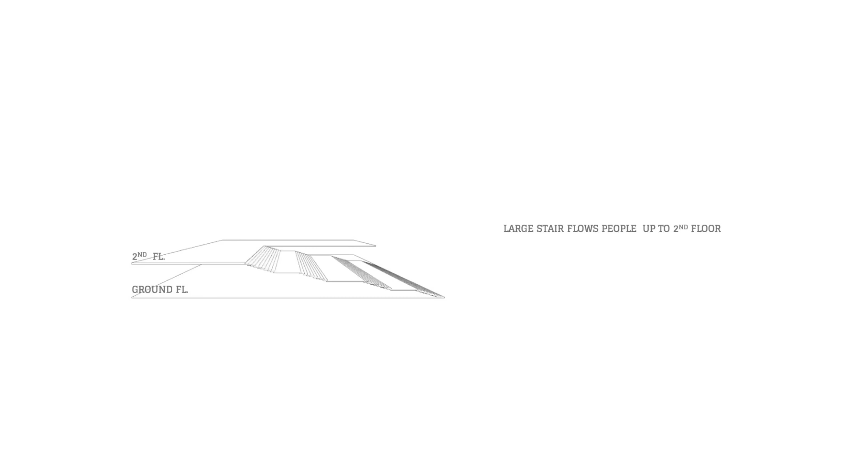The first challenge of a multi-story commercial building is how to flow the customer up. Normally, shops on the ground floor work much better than those on upper floors. We provide a large staircase to draw people up from the ground. The stair is as wide as two-thirds of the frontage. Then we fold down half of the stair to get customers into the back of the ground floor area.

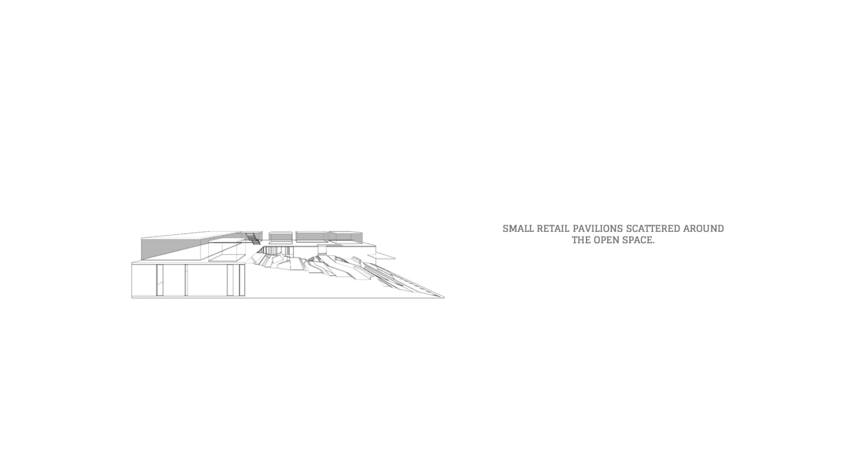This main open-air space was called the common ground. On this floor, we place small retail pavilions scattered throughout the space. Then we add seating and planting to make the customer feel leisurely walking up.

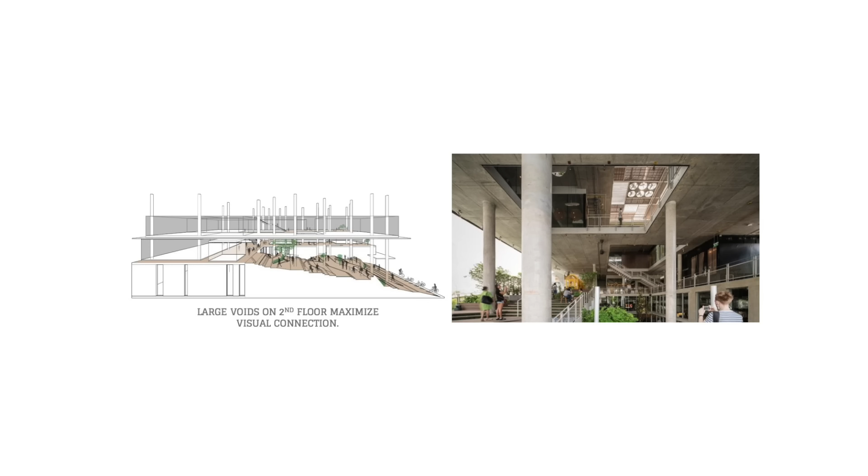Large voids on the second floor maximize visual connection. Customers arriving at the property from the road will immediately see shops on the upper floor. On the third floor, there are also large voids. Customers can see and be seen from all levels. Then the roof.

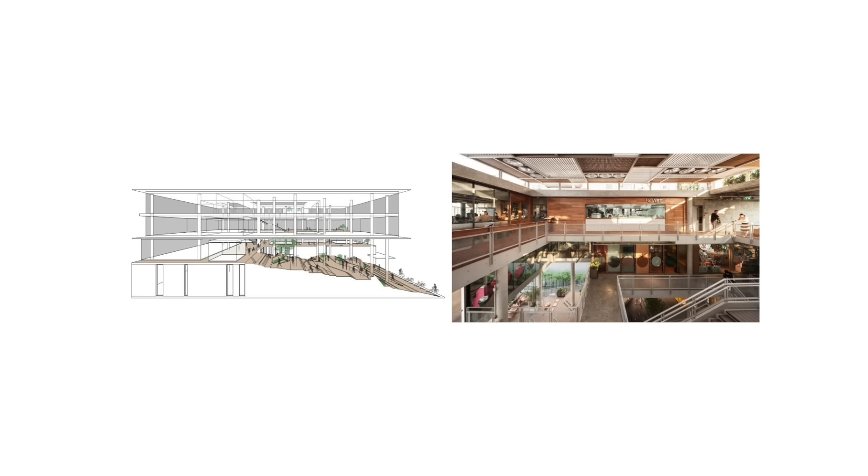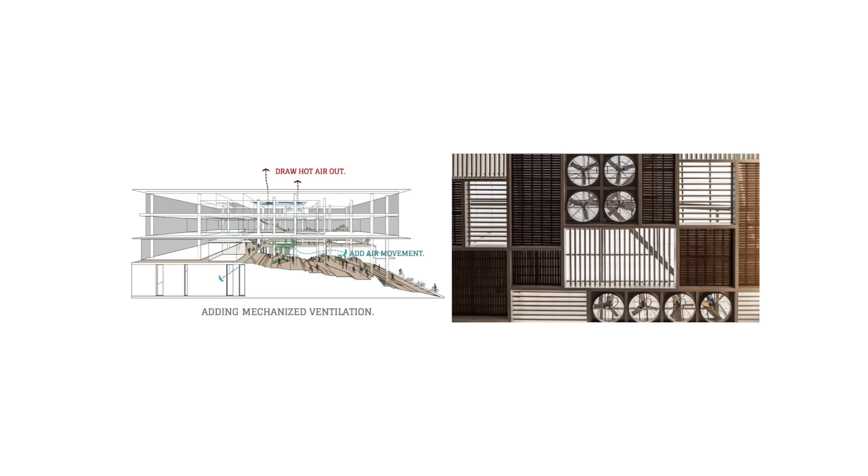A large skylight in the middle brings light into the open-air space. Now, the biggest challenge is how we make this open-air space work well in our hot and humid climate. Beneath the skylight is a screen that diffuses strong sunlight into a more comfortable light ambient. We provide two sets of industrial fans incorporated in the screen. One set draws hot air out, another blows air down to create air movement for customers' comfort. This common ground is so open that it allows ventilation to come in from all sides, or even from higher levels, wind comes down through the large voids on the floors.

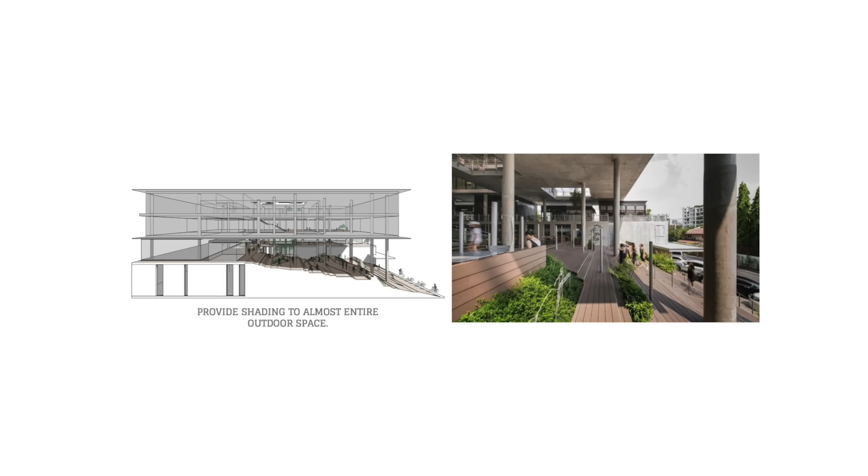The upper floor structure floats above the common ground and acts as a big umbrella that provides shading for almost the entire area and protects the common ground space from the rain. The gesture of the architecture is welcoming. It widely opens up to the neighborhood.

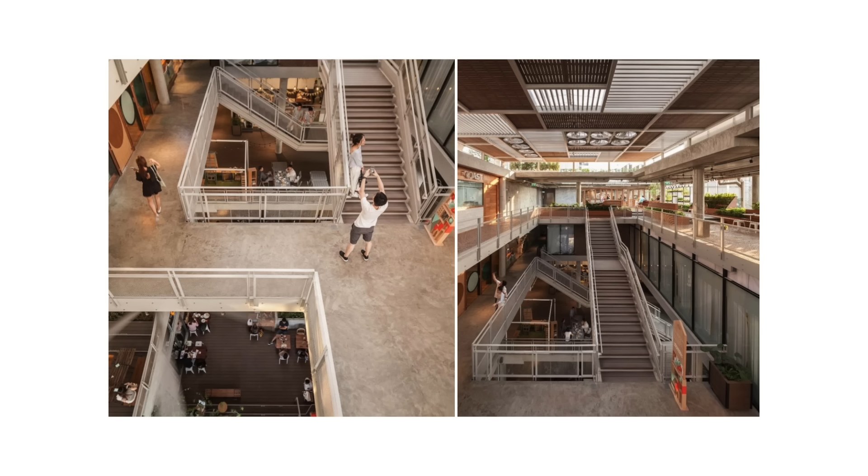The project attempts to carve out an open-air public living space, folding upward as a backbone of the building within such a limited footprint. In this common ground, customers can leisurely sit on chairs, benches, steps, or lie on the floor mat. This common ground becomes a place where grandparents stop by in the morning for a cup of coffee, office workers come for a quick lunch, housewives bring their kids to play after school in the afternoon, and expats and young Thais enjoy dinner and hang out together at night.

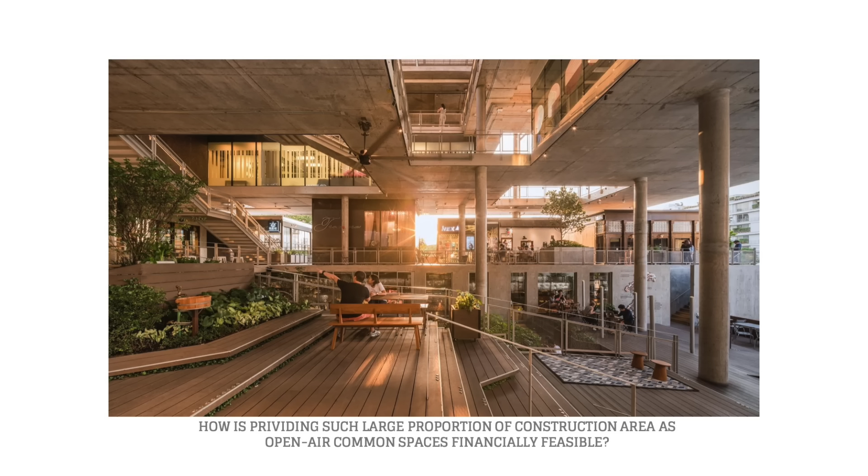The challenge now is how to provide such a large proportion of construction area as open-air common area and make the concept work financially. In a normal community mall case, for the ground floor area we have, we might be able to put in 7 normal-sized restaurants, where a third is their kitchen. We propose that each shop only take half the usual size, just enough for their kitchen and a few stools. So now we can get twice the number of restaurants.

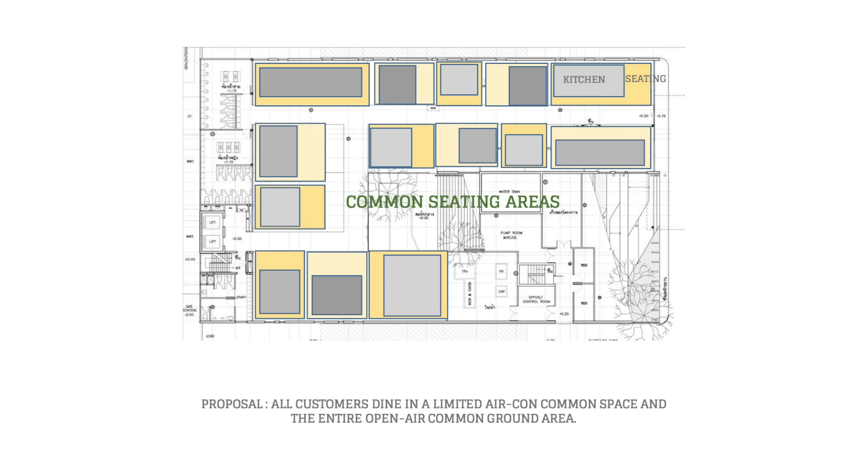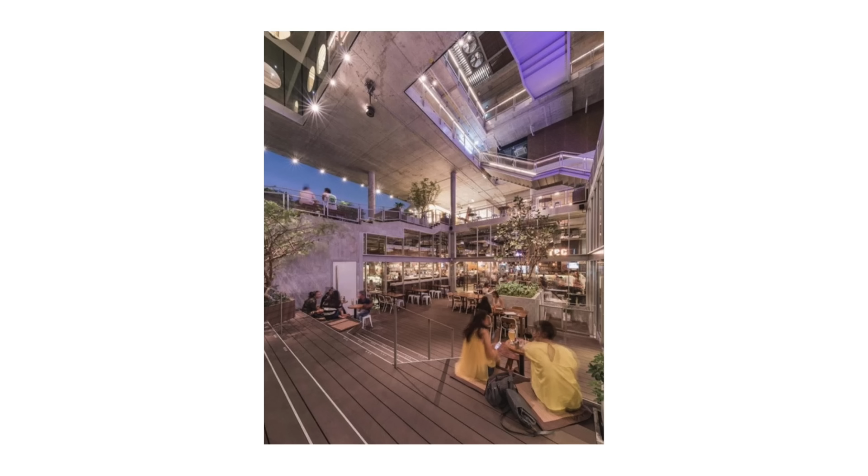All of their customers can dine together in a common area, in a small air-conditioned space, or on an expanded open area of the common ground. We convinced the owner that this is actually a win-win-win situation. The first win is for us, the architect, that we could get an impactful size of open-air space. The second win is for the project owner, that they invest much less in construction costs and a lot less in building operating expenses, since a large portion of the building has no air conditioning.

And the last win is for the tenants themselves, since their expense for starting up a shop is only for the kitchen. Seating areas are provided by the property. This scenario attracts newcomers who don't have big investments like those restaurant chains, which is why there are lots of new and interesting small restaurants there, not repetitive like chain restaurants in shopping malls.

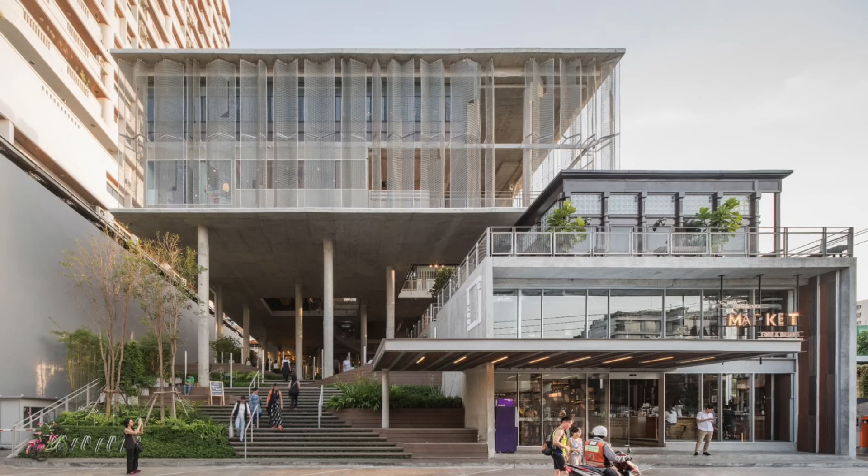Architecture of this private property has now become a common space for community. By saying architecture, I mean architecture, not architect. These kinds of efforts don't take an architect alone to do it. It needs collaboration between the architect and the investor.

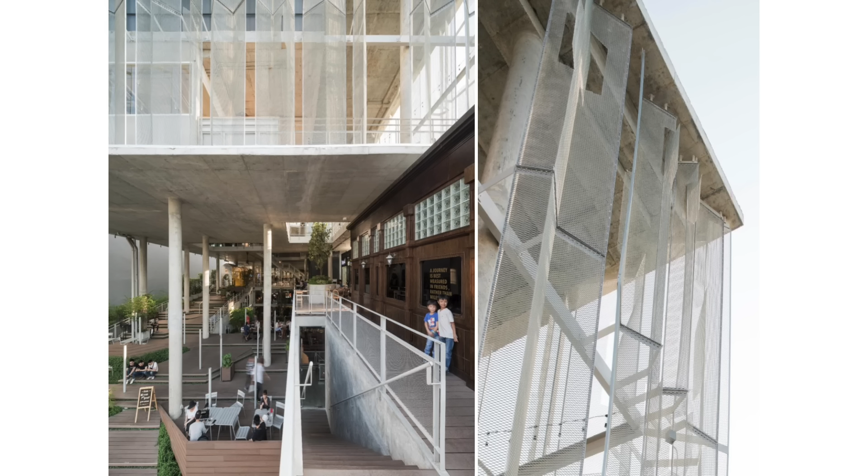In this project, the architect proposed the space that would conceptually work well in terms of architecture. But it is the investor who would have to be willing to sacrifice the expensive rental space in exchange for a communal public space. However, they have to work financially.

The next project that I'm going to show is a small pavilion called the Flow. It is a multi-purpose pavilion for a community near the beach. The site is on this empty concrete platform, and the client does not give us any project brief. They wanted us to help propose a pavilion that will be useful, and the rest is up to us.

We started not by designing the physical building, but by designing the activities that could happen in the space first, the program that would best suit the site. Then we cut and fold the floor plate and allow the possibilities of those different usages to happen.

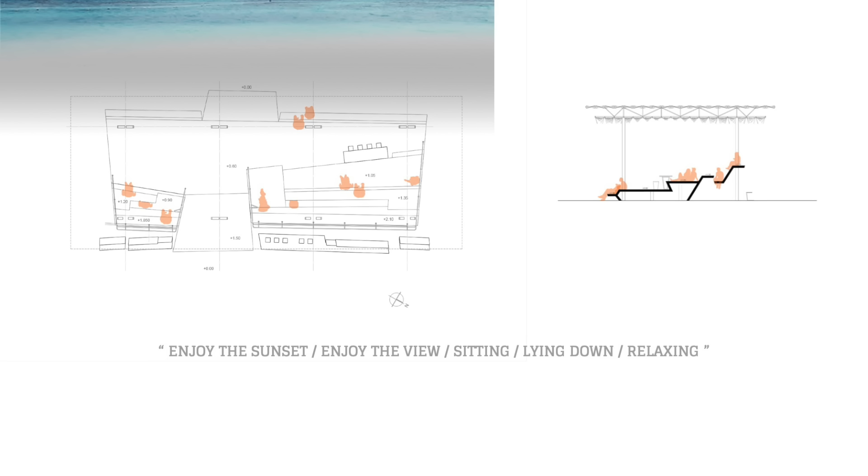The plan and the section are designed to open up for different possible activities, different ways that people can come and interact with one another, with the site, and with the architecture. And as the site is on this concrete platform with blazing sun, the architecture needs to become a shading device.

We are not thinking about the roof as a traditional roof, but rather we look into nature for reference of an effective way of shading and cooling with a volume, and we see a volume of small elements like leaves that the air can move through. It gives the shading and the air can move through, rather than a normal roof which would block the air from moving and flowing away upward.

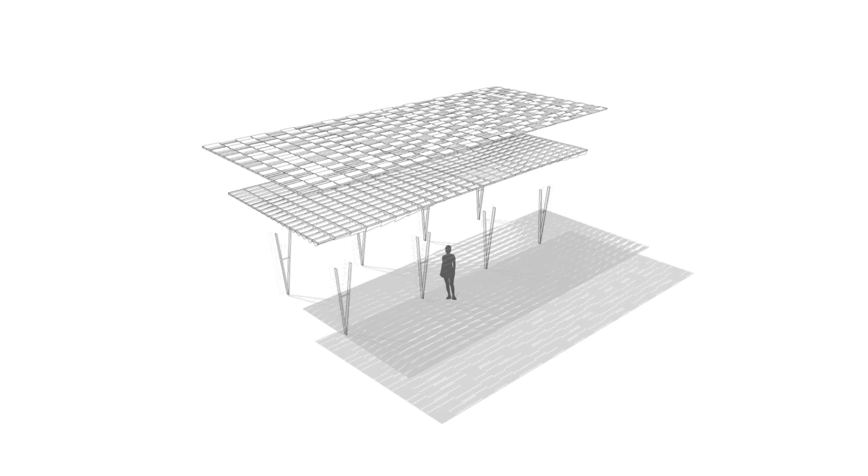Hence the design of the shading started to be formed from the idea of tree leaves. We have designed layers of small elements that superimpose on one another, which will help form the shading, while also still allowing some light to seep through into the space. And that's a study of the building.

And we have studied the possible ways the small elements can be fixed at different angles that would allow different levels of sunlight or the light that comes through.

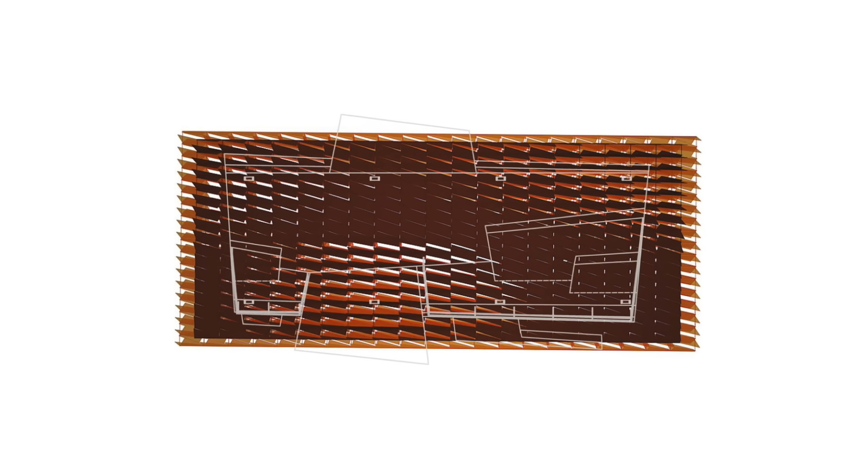And we superimpose this onto the plan, on the floor plate of the plan, where people would sit, like the main space that people would sit would be around here, and that's the entrance. So we are able to open up the elements much more in the space where people are not actually sitting, or on the edge, around the edge where people are not there. So the usable space within the building kind of informs how we design the pattern or the rhythm of the roof itself.

And we use two layers of the roof, with the translucent roof on the top and the solid one on the bottom. And that's how it works out to become the area of the roof around the entrance into the floor plate. So these are more close-up details.

The elements are sort of like tree leaves that give shade, allowing a little bit of sunlight to come through, and also the heat that usually rises up will be able to escape the building.

So this is the final design of the building, and the design of the floor plate itself has been like a folding plate.

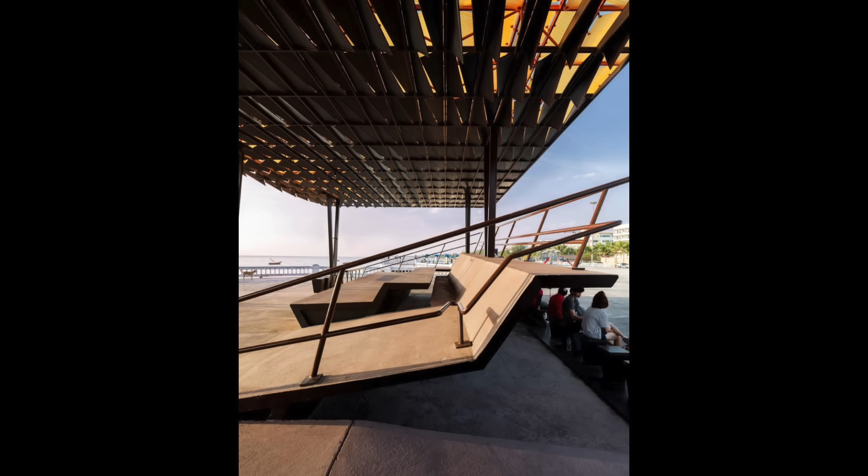in 2 layers, on the ground and on the top. So it allows for different variation of usage of space, thus becoming multipurpose.

In this image you see how the floor plate has been folded, and sometimes it folds up and becomes a table, and folds down to become a chair, where people can sit.

As you sit up high in the air, you need some footrest, so we designed a footrest for the people underneath the folding chair. The footrest itself at the feet becomes the facade of the building.

Looking at approaching the building from the land side and entering the building, there is some detail that people can step on to go up to the higher level.

There is also a fixed table at the end where kids can come and do their homework, and even at the edge of the floor plate, it also falls down and becomes seating that people can sit on.

People can sit down and look at the sunset view over the sea. Another view to look at the floor plate that becomes the chair and the table, with the light.

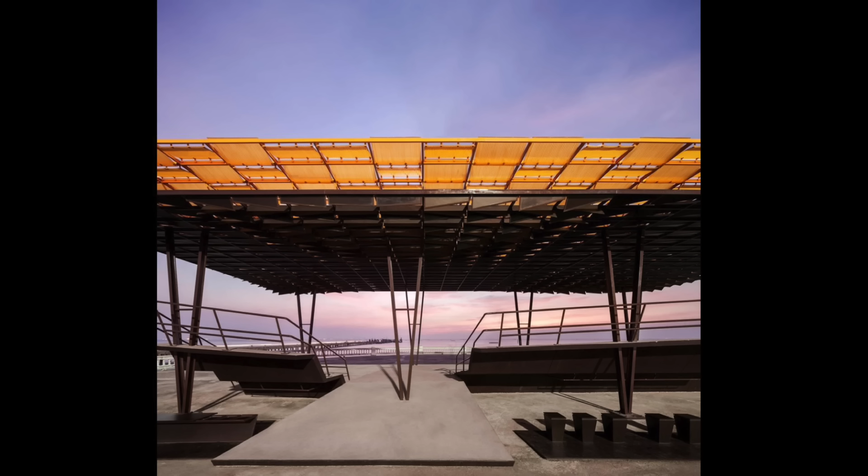Next is Little Shelter Hotel, a small hotel in Chiang Mai, Thailand. Chiang Mai was once the capital of Lanna, the historic kingdom of northern Thailand, established several hundred years ago.

It's renowned for its beautiful old temples, crafted wooden houses, and unique vernacular structures, all reflecting the impeccable craftsmanship of northern Thai artisans. Chiang Mai is also celebrated for its exceptional handicrafts, from wood carving and silverware to silk and paper umbrellas of Bo Sang village.

I would say craft is truly the spirit of northern Thai culture, so it was our intention to embody the sense of craft into the architecture.

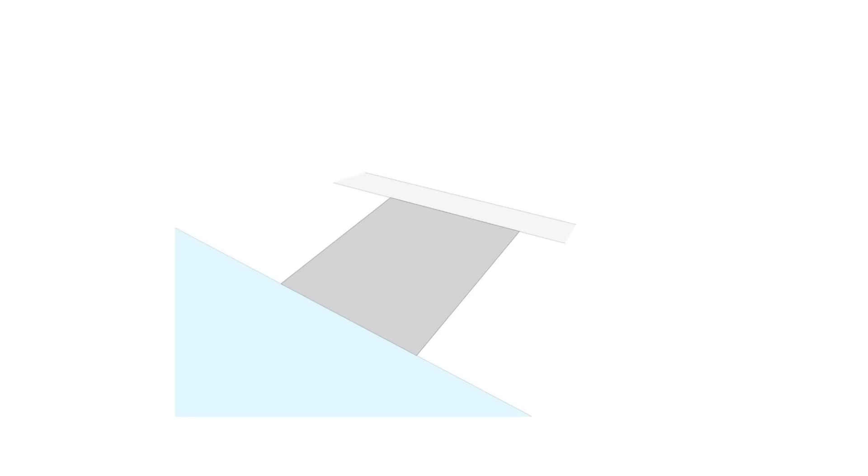The plot is very small, only 500 square meters, on the beautiful Ping riverbank. With the required setback from the law, it leaves us this footprint. With the maximum height allowed by the law, we get this volume.

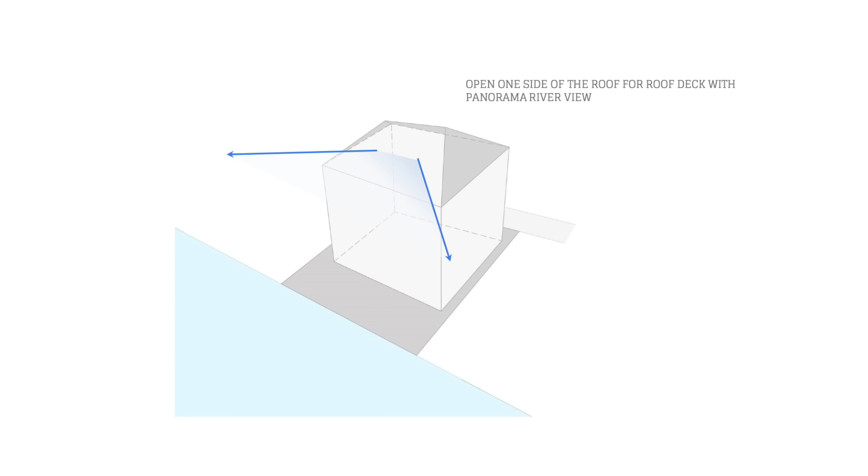The roof form is an asymmetrical hip pitch. Then we open up one side of the hip roof to the river, so the roof deck will get a beautiful panoramic river view. We decided to clad 3 sides of the roof and 2 side walls with wood shingle.

The material is traditionally used in traditional northern Thai houses. For the facade facing the river view, we punched a square void for each room terrace. We explore using new material installed in the traditional technique of shingle.

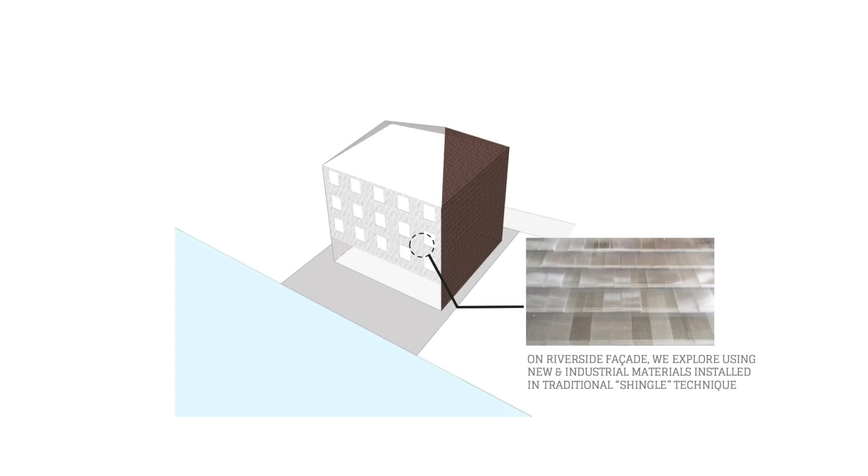The new material is polycarbonate sheet, cut into shingles with 2 levels of translucency. The mock-up reveals an interesting blurring effect.

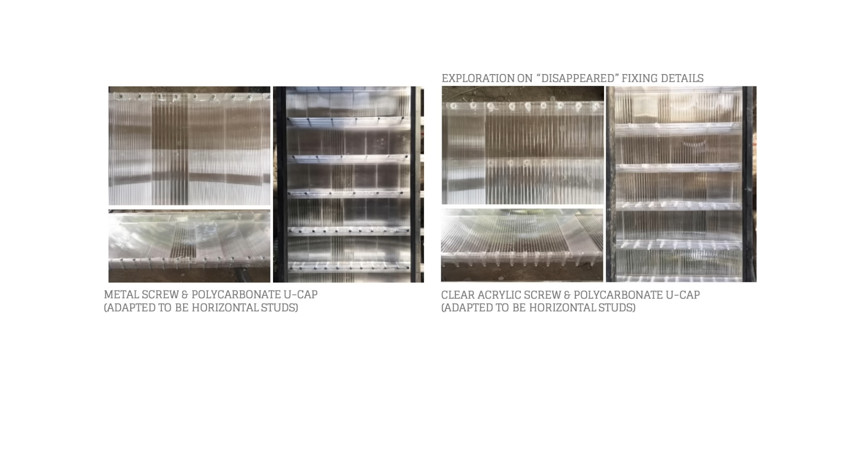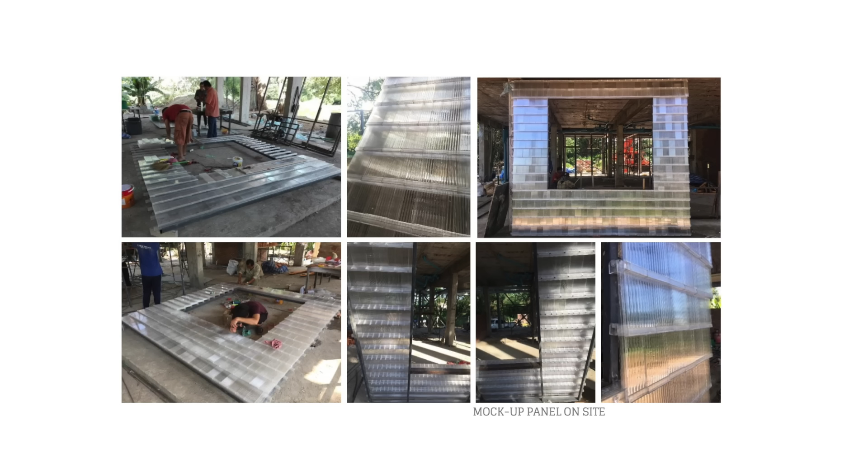Since the material is transparent, we explore new detailing to make the support structure as invisible as possible. We use U-shaped polycarbonate caps as horizontal supports, secured with clear acrylic screws. The mock-up on site confirmed the intended translucent and refined finish.

On the entrance facade, the upper portion is made of solid wood shingles, gradually transitioning and mixing with translucent polycarbonate shingles in the middle and lower parts.

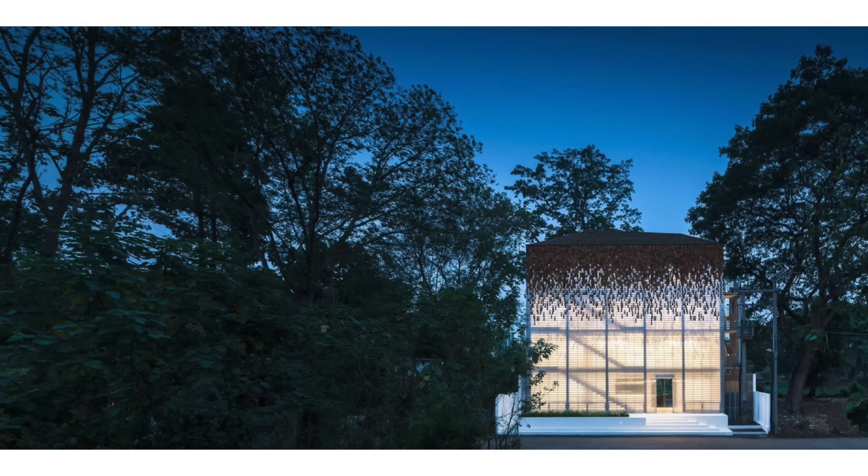These translucent facades subtly reveal the movement and flow of the architectural space behind. As sunlight touches the varied texture, the facade glitters, with each material catching the light in unique ways.

From the solid wood shingles to the different translucency levels of the polycarbonate shingles, an uninterrupted sheer polycarbonate shingle facade surface is achieved by a special detail design using translucent studs and special transparent screws.

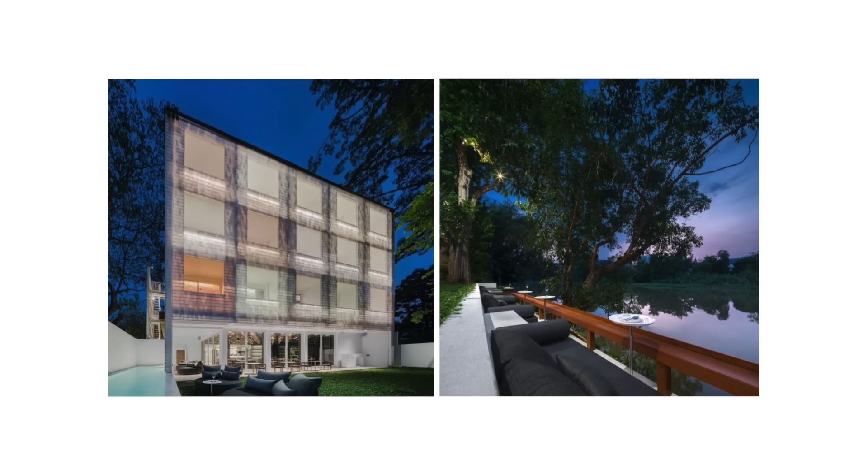The riverside facade shows square voids at each of the guest room balconies. It subtly brings out different colors from the guest rooms. On the right, a step-down day bed along the riverfront lets guests be closer to the river.

The wall appears as a weightless, translucent skin without any interruption.

Sunlight filters through the facade, casting a shifting ambience within the lobby atrium throughout the day. At the entrance, a combined hotel reception, cafe, and bar warmly welcome our guests.

In the lobby atrium, we chose to enhance its verticality with a site-specific installation. Here, we wanted to give new life to the local handicraft of Bo Sang umbrellas, which seem to be considered obsolete nowadays. Even though the umbrellas had been made by villagers for 100 years, they are now only sold mainly as cheap souvenirs.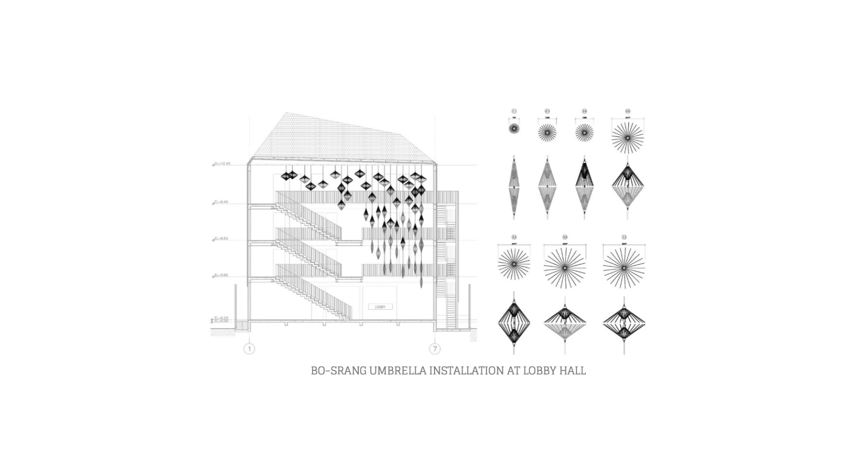We designed a 10-meter high site-specific installation made of hundreds of umbrella frames from Bo-Srang village, playing with the different opening angles of the frames. We and the local artisans had a great time exploring the installation detail together. They were fascinated to see their simple product used in a new way, transforming it into an art installation, with umbrella colors transitioning from wood tones at the top to white at the bottom, complementing the facade gradient. The umbrella installation seamlessly integrates with the architecture, reinforcing the dialogue of reinterpreting tradition into a contemporary language. The facade brings in soft, diffuse light, becoming a glowing backdrop for the installation.

The stark white space has a gallery-like quality, presenting the site-specific installation as an art piece rather than mere decoration. As daylight shifts, the atmosphere in the gallery atrium transforms subtly, responding to the change in sunlight and the colors of the sky, adding a dynamic quality to the space.

Little Shelter is our contemporary interpretation of Northern Thai architecture, particularly on creating a dialogue between the old and the new. The structure seems less of a building, but becomes more like a piece of craft work, a contemporary craft architecture we are aiming for. It is a representation of the past, the present, and probably the future of Chiang Mai to its visitor.

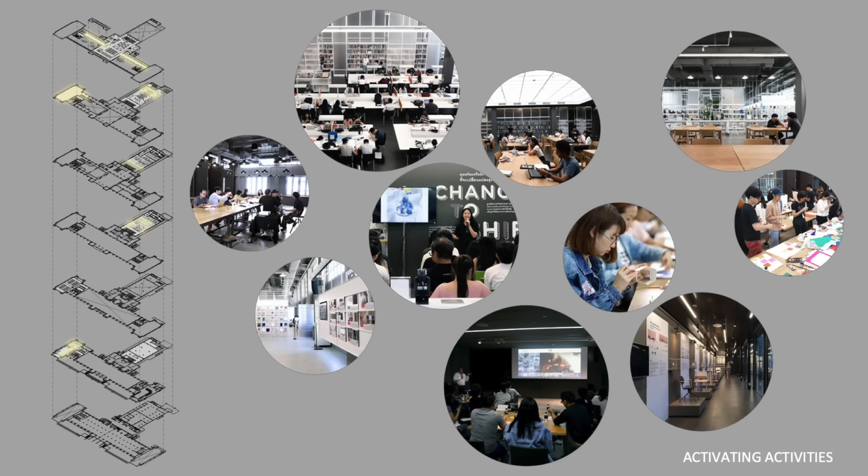In our design, we think that the creative space is not creative because of how it looks, but it is a place that is designed to become an agent that can activate creativity and be a platform for inspiration. The architecture is thought of as a platform rather than a thing in itself. It is a place for people to come, to be inspired, to look for knowledge, to study, to experiment and explore. And it is to be a device that TCDC as an organization can use to stage various design events, from casual talks to workshops, gathering events to large and small exhibitions.

The free flow open workspace is planned to spread throughout the building, mixing with other programming so interactions can happen everywhere and cultivate the exchange of ideas and conversations. A reading space might mix with a cafe. A material sample library can mix with a workspace. A workspace in an experimental workshop, which is a maker space, can also mix with an exhibition display that is produced in the space. Creative space is about creating a space where people can connect and be inspired by each other.

Portion of the library is designed to encourage conversation rather than to be a conservative, muted library space, and in some part it's more like a cafe setting. Sometimes creativities need a space for contemplation, a little more private, pocket spaces. So we design a different variation of the ways that people would use the space for their creative thinking.

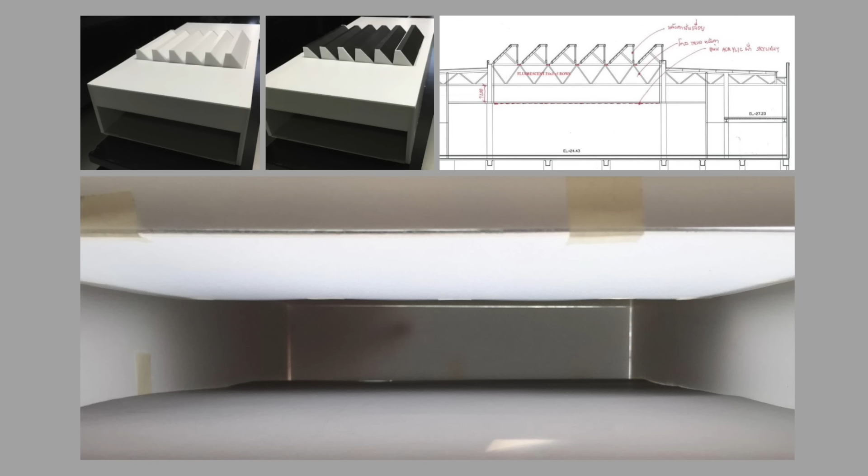Above the plane of the diffuse light, we design a north-facing sawtooth roof to prevent direct sunlight from entering the space, only allowing bouncing light to enter. We studied the size and proportion of the glass opening through physical models to ensure just the right balance of light, avoiding excessive illumination and heat.

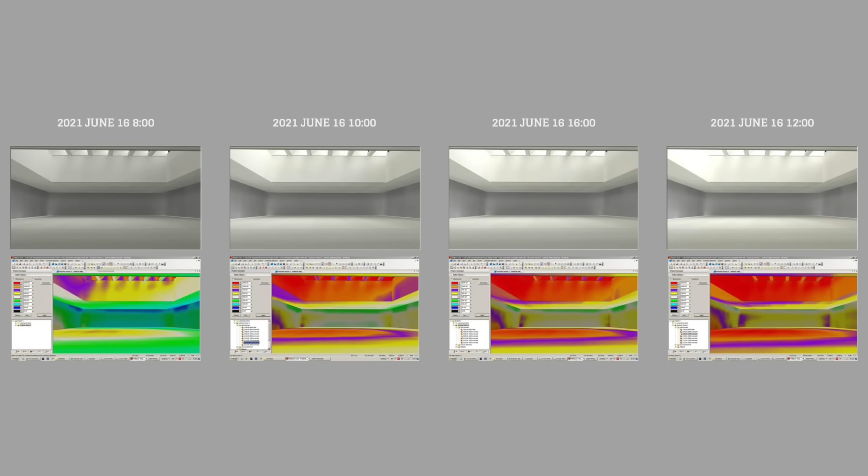Additionally, a high volume above the luminous plane - we designed it to be a very high volume to block the warmer air near the roof from entering the occupied space. And finally, we verify the daylight level with simulation software to ensure that the suitable lux level is appropriate for reading conditions throughout the day and across the seasons.

To create a space open to the exchange of ideas, we need a central core with enough large scale to invite people to gather together and inspire and to be inspired.

Now let's take a look at the existing condition of the space that we have.

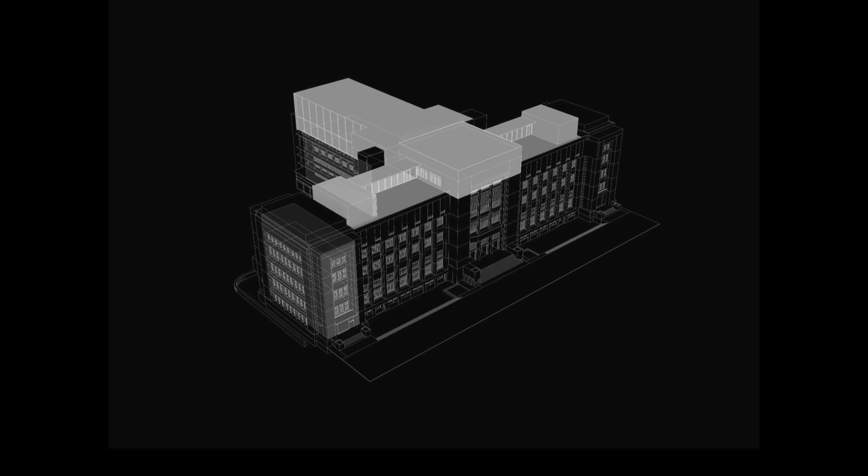There is still no large enough space for the kind of place we imagined, a gathering space that people can come together. So we propose to make an addition on the roof to create a new space that becomes the main central space of the design center on the top floor.

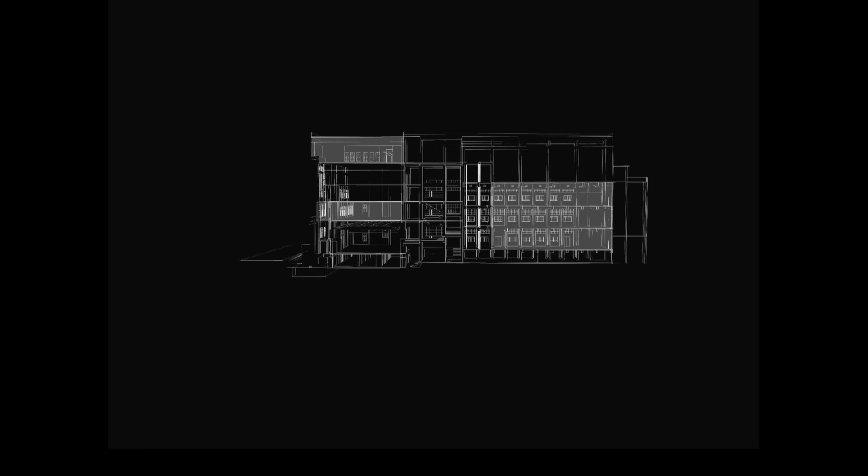We're going to show you the cut through this section in the middle of the building, as you can see the rental space is also scattered throughout the building.

So what we have done is make the new space connect the front and the back wing, and the main vertical circulation is inserted to connect all the floors together.

This inserted vertical circulation cuts through the building, opening up a large glass plane on each floor, circulating visitors throughout the building and connecting them to the various activities occurring across it that would otherwise remain hidden.

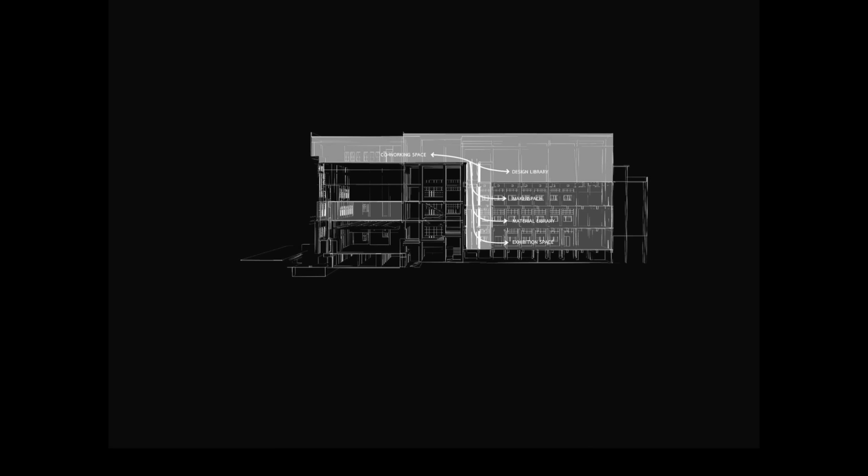We believe that this is the main gathering space of the building.

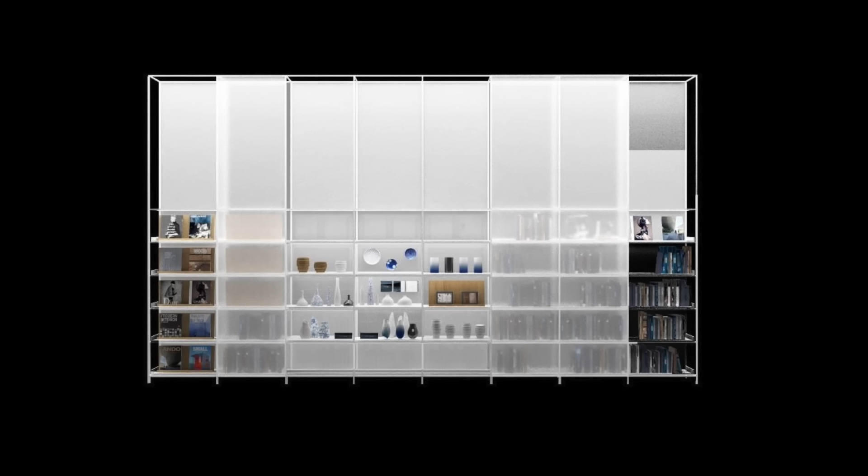We believe that a creative space is not about architecture that tries to look creative, which in a few years would have its freshness worn out. Instead, we created an architectural system as a container of various sources of inspiration, surrounding you with things ranging from books, magazines, digital media, material samples, to exhibitions, etc.

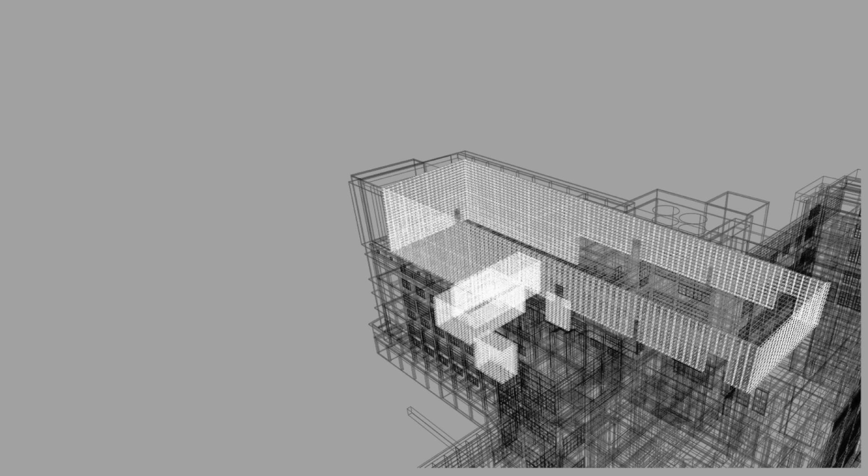That's like an X-ray view through the building. The system is created and inserted into the shell of the old building, making it wrap around various workspaces, constantly immersing people with the inspiration that the system is holding.

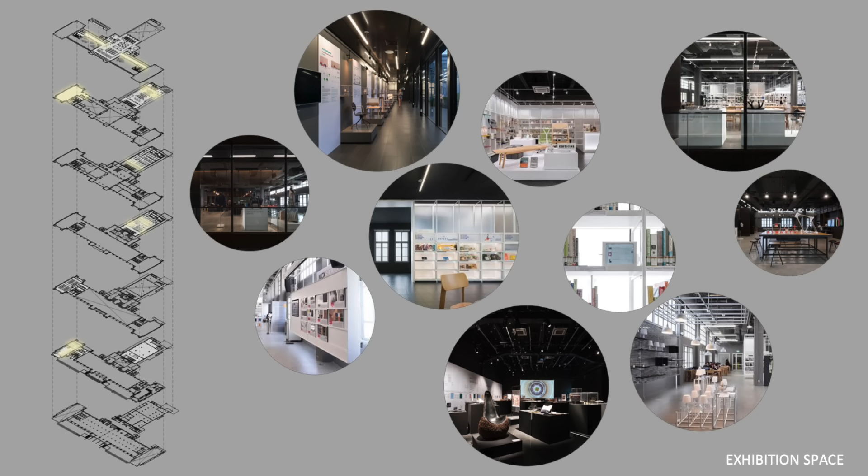We planted exhibition spaces throughout the entire building, from exhibition rooms to small exhibition corners, pockets, and display shelves. You will always be surrounded by fresh ideas everywhere, every time you come here, whether you're in a co-working space, a library, a workshop, cafe, or even walking by a corridor.

Integrating adaptable exhibition nodes throughout the space allows it to evolve over time, transforming the architecture into a platform for inspiration. The new architectural system inserted into the old is offset from the shell of the existing, revealing rather than obscuring the historical shell. It becomes a dialogue between the old and the new.

Sometimes the new system is created as an object situated within the old, exposing the entirety of the existing structure. The system becomes an exhibition corner, a showcase space, an arrival hall, inserting itself within the existing, exposing it to create a dialogue between the old and the new.

The bookshelves, or even the whole system, become a volume of book stacks that you could walk into.

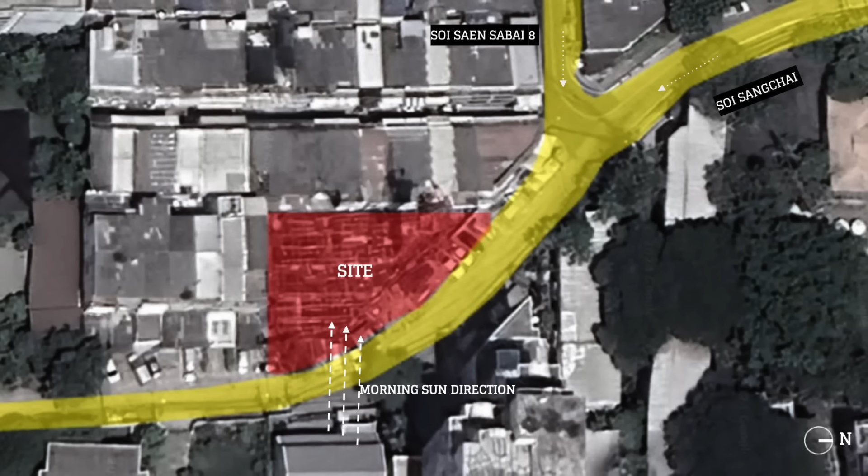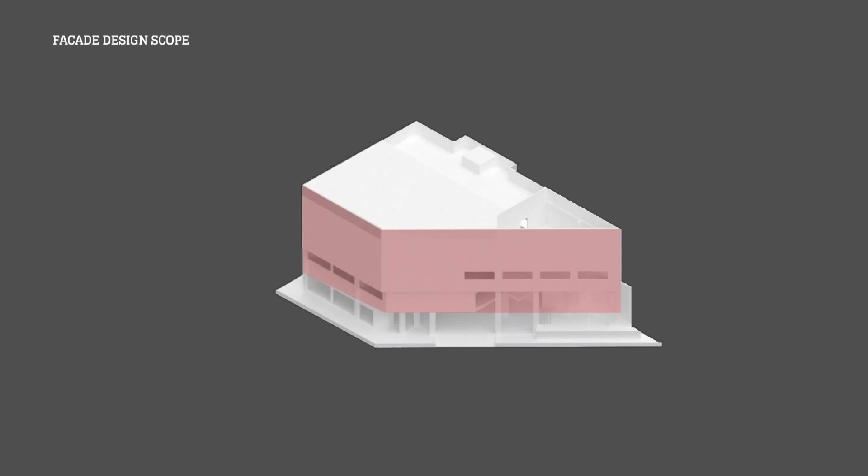The project began as a design-build effort by a church member's construction company. They completed the basic structure, but the design, particularly for the facade, was left unfinished. We were brought in to design the two street-facing elevations and the cross on the facade. Though our role was limited, it was meaningful and impactful.

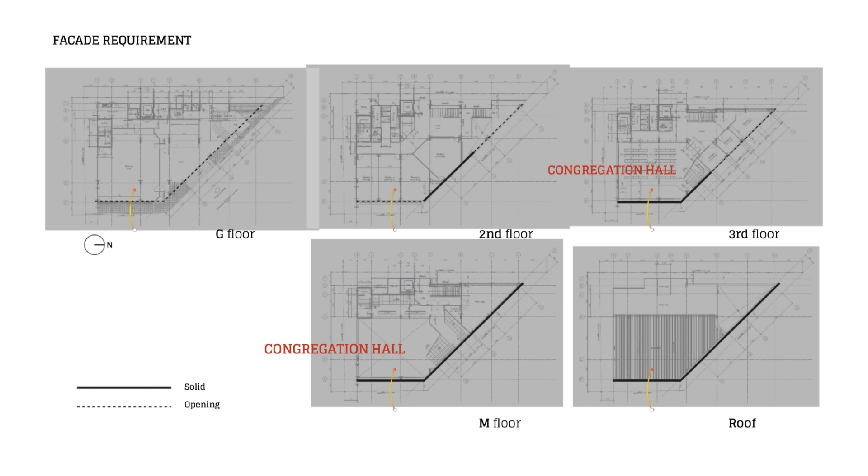The morning sunlight became a key element. As churchgoers arrive, they are welcomed by the facade illuminated by the first light of the day. Our scope extends to the interior congregation hall, a double height space on the 3rd and mezzanine floor. We allowed light only through a single tall opening, backlighting the interior cross located at the corner of the stage.

Let's begin with the facade design.

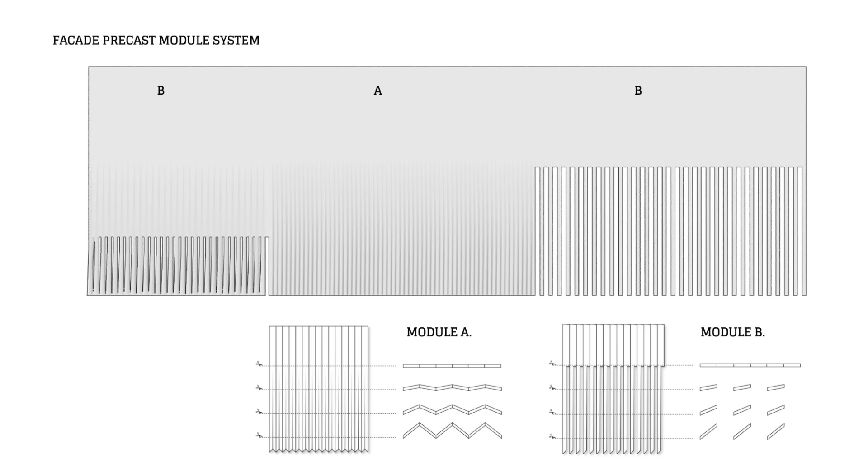The facade is envisioned in white, acting as a subtle backdrop for the cross. Designed using a precast system, it began flat at the top and became increasingly pleated toward the base. The design relied on precise molding and installation, ensuring seamless alignment. These curtain-like pleats create a delicate setting for the cross.

The pleats interact with the morning light, casting intricate shadows, while vertical slots serve as openings to the classroom behind. In overcast light, the cross is intentionally subtle, almost barely visible.

Now, let's take a look at the cross on the facade, the Covenant cross. We designed the cross with vertical fins that vary in depth, subtly suggesting Jesus' silhouette, to reflect the joyful spirit of the Church of Joy.

We drew inspiration from Genesis 9:16: 'Whenever the rainbow appears in the cloud, I will see it and remember the everlasting covenant between God and all living creatures.' We chose acrylic material that reflects a rainbow of color, mirroring this covenant. Though colorless itself, the material reveals shifting hues based on light condition and viewing angle.

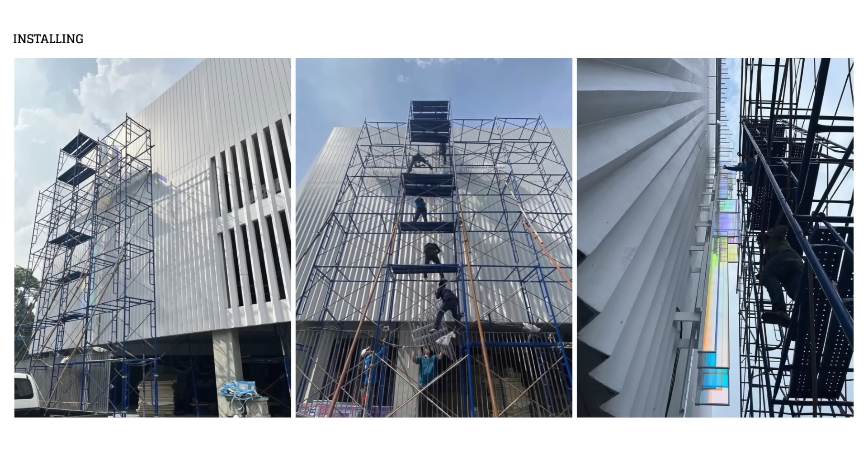Our mock-up confirmed the effect, casting vibrant shadows as sunlight interacts with the cross. The cross was fabricated in 5 parts and installed on the facade within 3 hours.

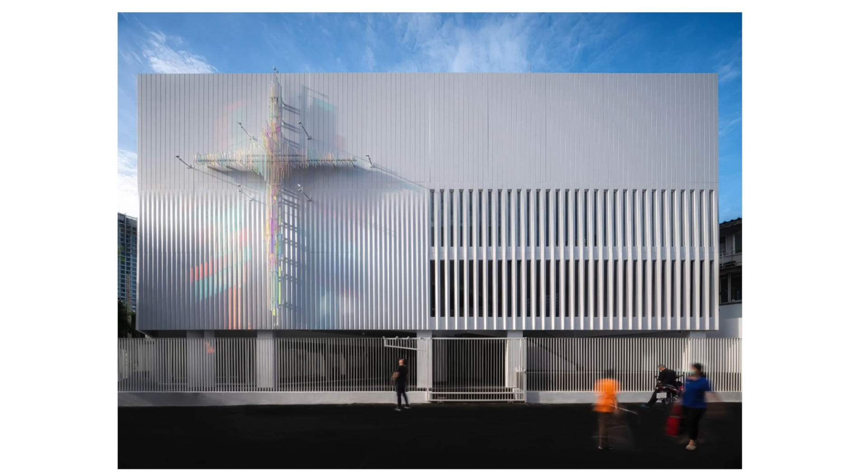Its color shifts with light and atmosphere. On overcast days, the cross reveals soft, muted hues, while in sunlight it radiates more vivid color. From a distance, it stands out as a vibrant landmark in the understated neighborhood.

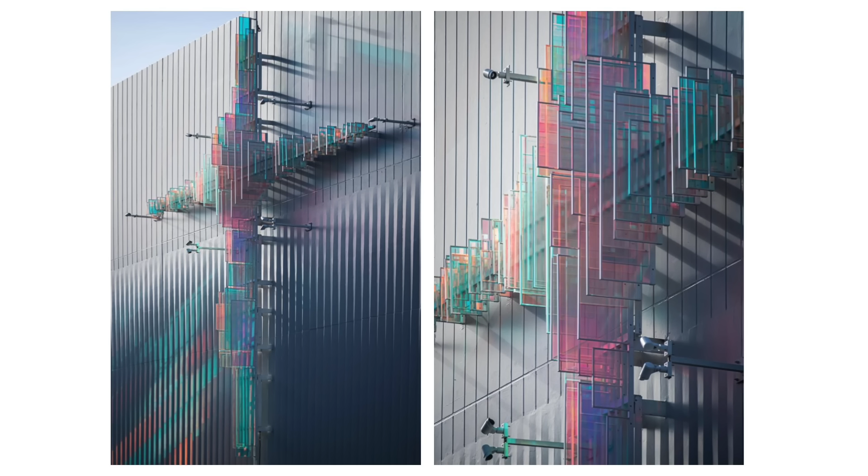The fin depths create a faint silhouette of Jesus. The pleated surface enhances this interplay of color.

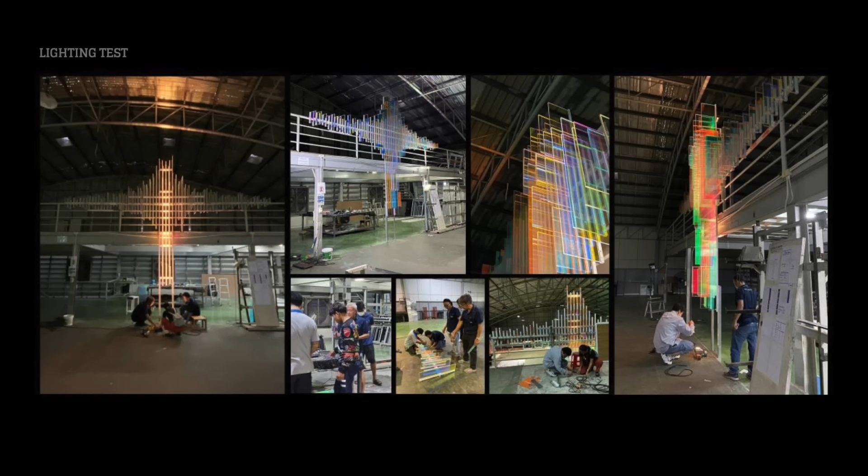We collaborated closely with our lighting designer to create an engaging visual experience at night. Using only colorless light, we rely on the acrylic material to create a striking colorful effect.

The lighting includes multiple scenes. In its simplest form, backlighting illuminates the cross entirely, while the spotlight radiates beams from the center. Together, these two lighting sources transform the cross into a glowing lantern and brighten up the neighborhood.

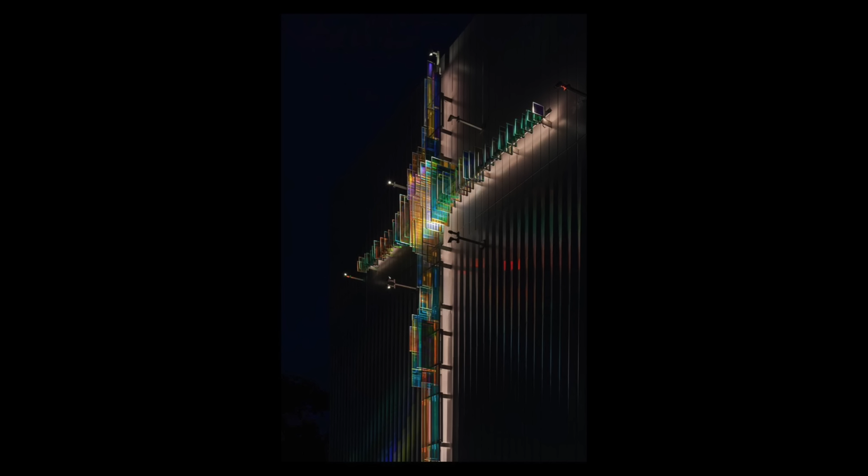In Thailand, a predominantly Buddhist country, this vibrant cross gently introduces the church, inviting curiosity, especially among younger generations, to explore the message of faith in a welcoming way.

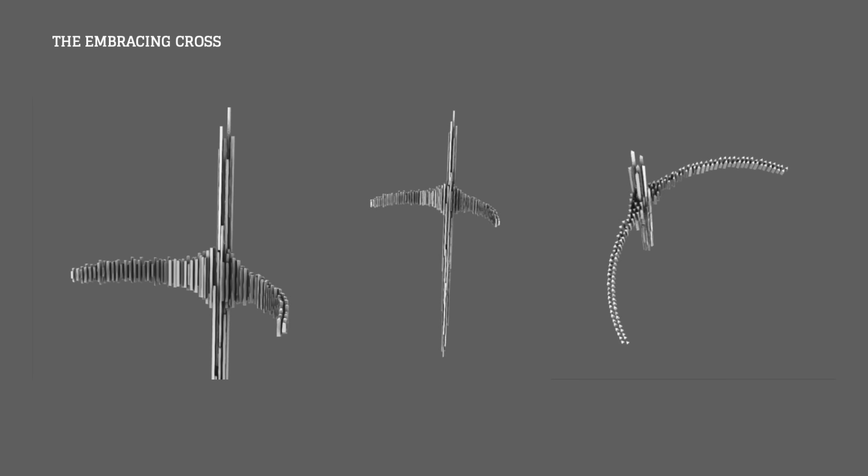Our scope also includes the congregation hall and an interior cross installation. Unlike a traditional cross, our design features arms that gently curve inward, creating an embracing gesture. This 4-meter-high cross is suspended from the ceiling, appearing to float with open arms.

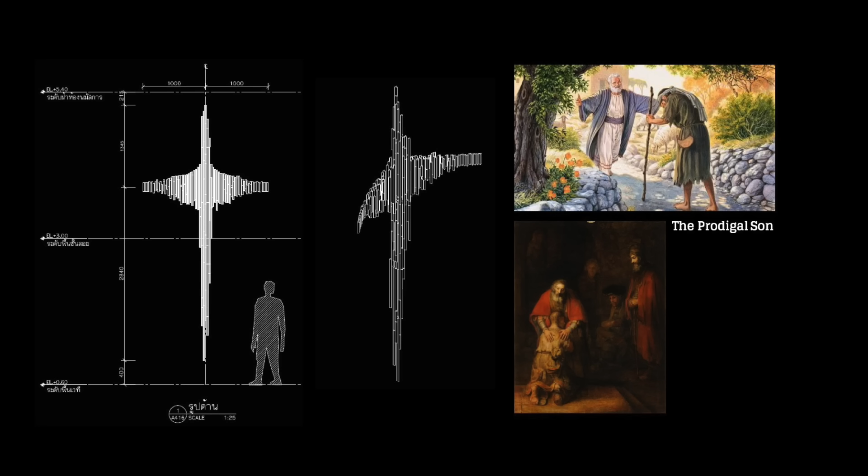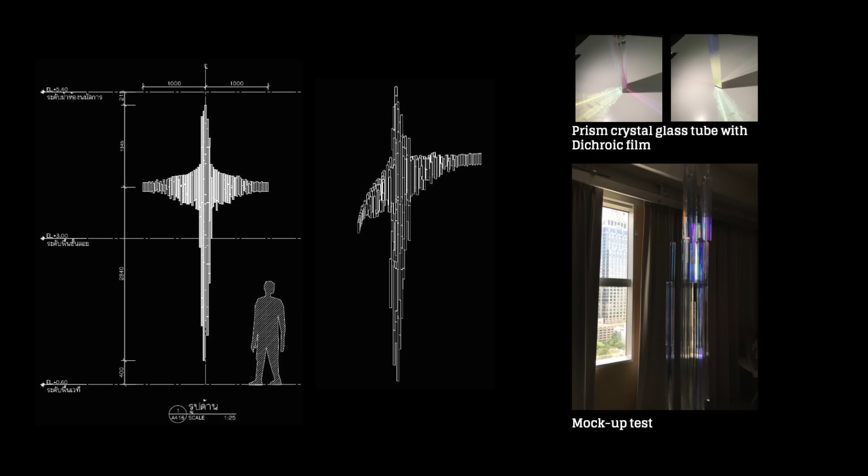Inspired by the parable of the prodigal son, the cross symbolizes the father's embrace of the lost son, representing God's unwavering love and forgiveness. Made of hundreds of prisms, some with dichroic properties, the cross reflects soft, rainbow-like hues around the space. Its light, transparent quality gives it an airy presence, almost as if it is floating upward.

At night, spotlight casts a colorful spectrum onto the surrounding walls. Backlit by sunlight from the vertical slot on the facade, the embracing cross appears to dissolve, symbolic of God's presence that feels beyond physical sight.

While I was inspired by the prodigal son for the cross, some see a dove, symbolizing the Holy Spirit at Jesus' baptism. The inward curving arms convey God's unconditional welcome.

The congregation hall's straw fiber walls were chosen not only for acoustics, but also as a nod to Jesus' humble birth in a manger. To further enhance acoustics, fire-retardant fabric strips ripple across the ceiling in soft waves radiating from the cross.

The cross's concave arms channel light almost like a concave lens, creating a powerful focal point in the hall.

Radiant and luminous, the cross shines through the dark, embodying the divine light. The Church of Joy is an architectural hymn, seamlessly blending the sacred with architecture and art installation, revealing its essence in every shadow, every color, and every beam of light that graces its space.

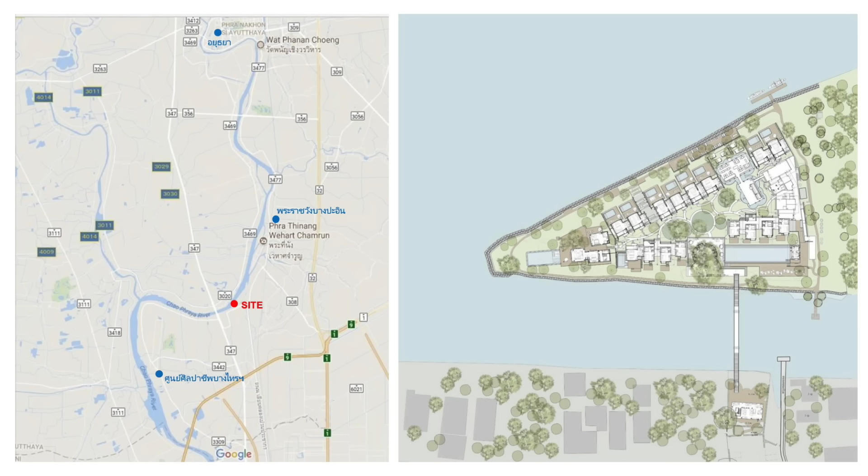The final project we are going to talk about today is Sala Bang Pa In, a resort situated in a rural landscape, surrounded by water on two sides. The location is quite unusual in that it is not in a travel spot or anything, unlike most other hotels or resorts. It is located in the middle of nowhere in a way, with a quite rural surrounding and community settlement.

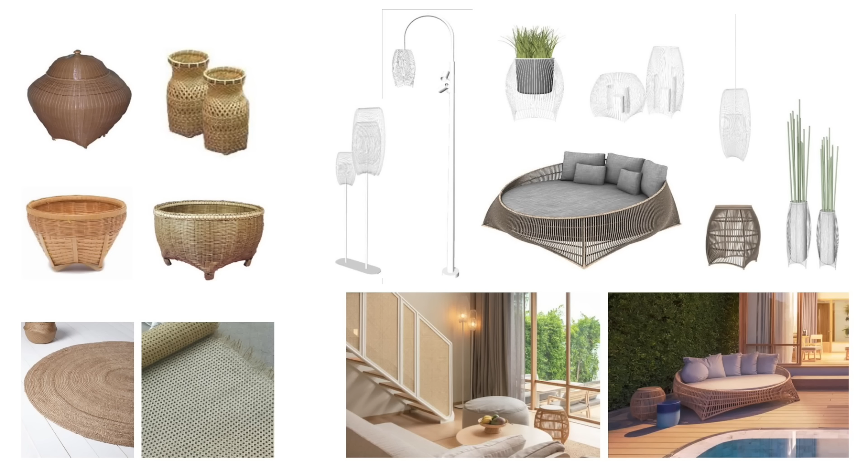The project is about how we can become part of this landscape. It is about contemporary reinterpretation of the local rural landscape, connecting guests to the life of the river and its atmosphere. The project has absorbed the sense of local craftsmanship into the spirit of the place. The design and materials are inspired by wicker works and various crafts, reinterpreted into modern architecture, and we have been designing almost all of the furniture in the interior as well.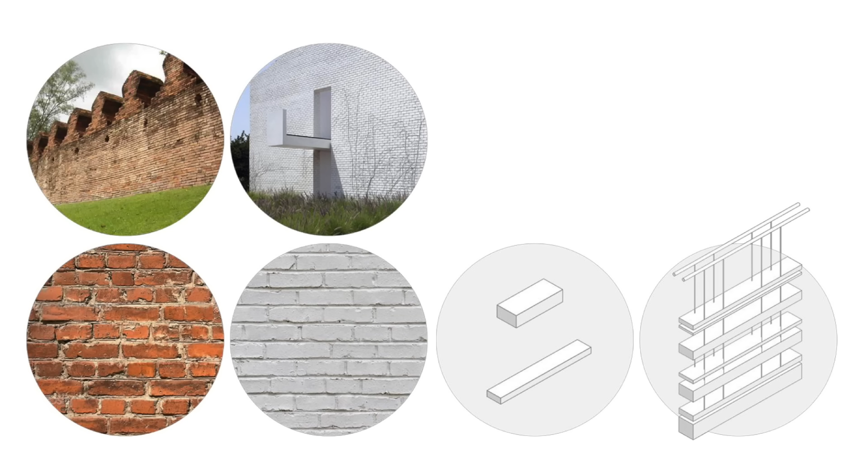Brick, which is one of the dominating materials in the area, is reintroduced into the project as a whitewash. The lobby and the bridges are red, in the same way that the vernacular buildings are very colorful.

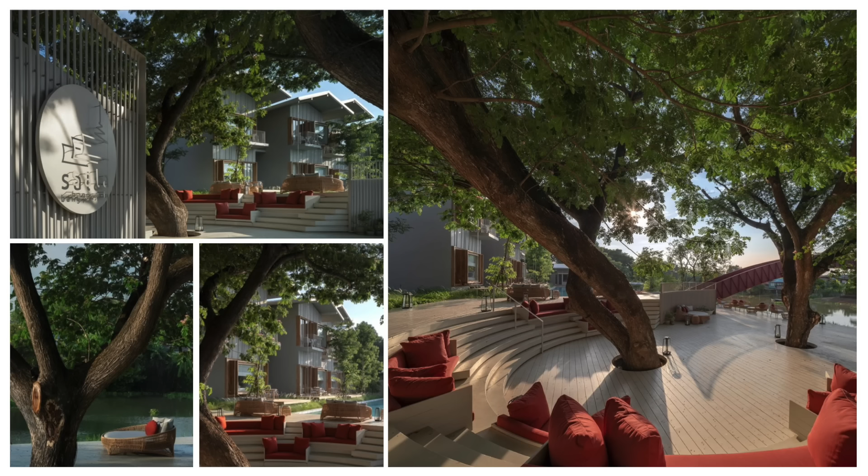The architecture on stilts, raised from the floodplain in the same way as the wisdom of the past, is also utilized. Living among nature and overlooking the river view, trying to push people out of their air-conditioned box into the nature.

The architecture respectfully reflects the roofline and scale of the surrounding community houses. The craftsmanship atmosphere inside - in this project we designed the architecture, interior design, and landscape.

We designed the main living space of each villa to be suspended in between nature. The front side fully opens up to the river view, while the back opens up to a tiny little courtyard for natural light.

In certain places, we poured a small amount of filtered natural light in to touch and heighten the effect of the white textured brick surface. The light itself becomes the intangible material of the wall.

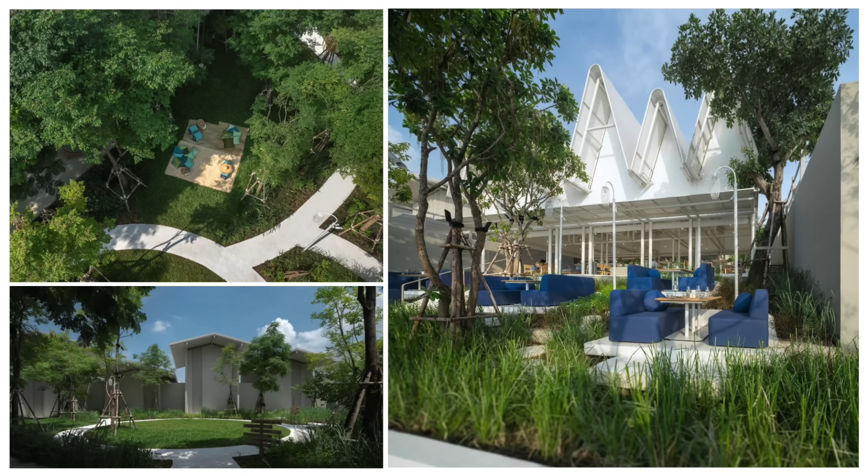The landscape of the project. The image on the right is a restaurant. The space of the restaurant terraces down from below the pavilion, terracing down outside and connecting to the riverfront.

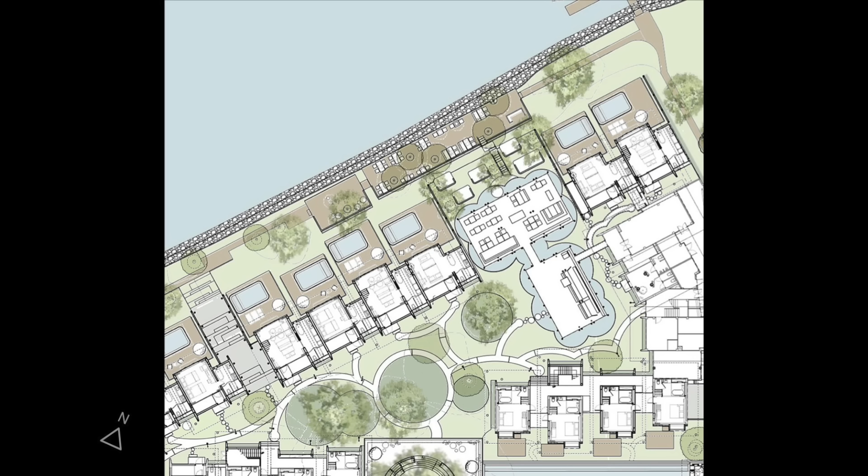As the river view is unfortunately on the west side, facing west, the use of the space has to be negotiated with light and shade. The planning and placement of trees, seating, and the building has to be strategically worked out. We study the sun movement and design a dynamic, usable space beneath the shade that continuously changes according to the movement of the sun throughout the day.

Of where one would be seated for breakfast, for lunch, or for sunset time and dinner. So we place different seating spaces according to the shading and the trees that we design. The restaurant building

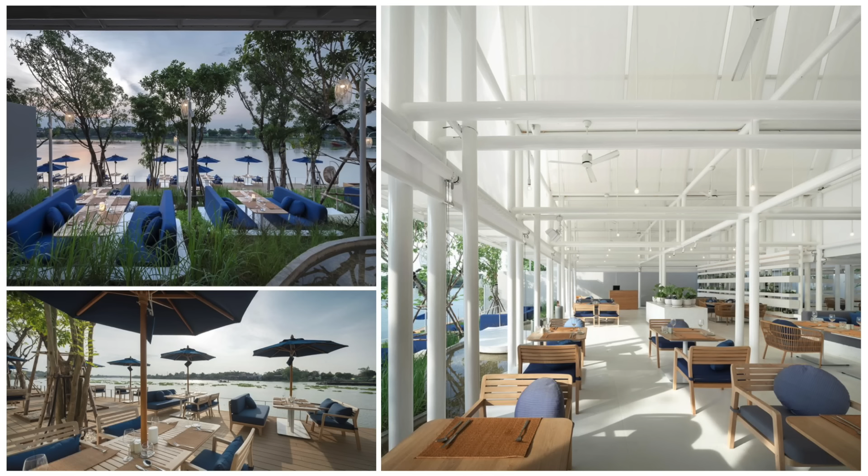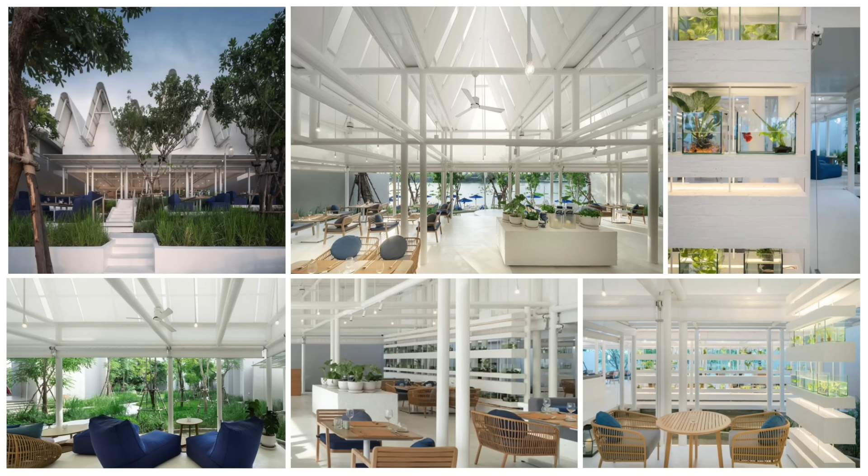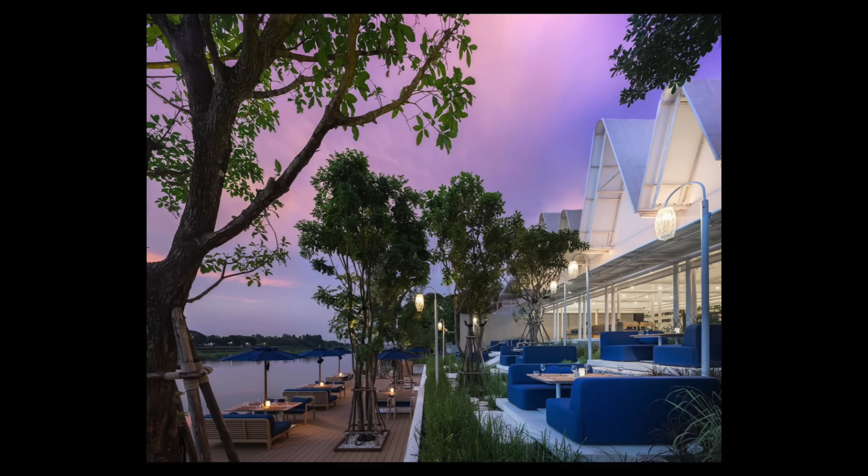is a total open air space without air conditioning. So we always try to reduce the use of air conditioning in the architecture. But in this building, we challenged ourselves to experiment on creating a space filled with beautiful soft diffuse top light, which is not normally found in the tropical climate. It is quite a challenge in this kind of climate to figure out how to do it.

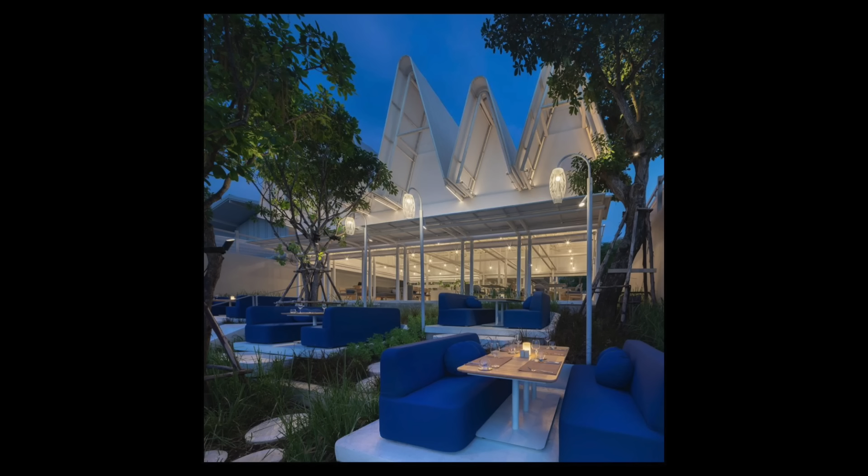We designed it with a really large roof volume. The building height rises to almost 10 meters, so the volume of the roof itself is really large, allowing the hot air to rise above the usable space into that big volume. On the edge of the roof, we provide an air gap so the hot air rising up can escape out, but at the same time the rain should not come in.

In the end, the rare soft diffuse light quality in the tropical climate is achieved, with comfortable temperature levels similar to other normal solid roof pavilions. Comparable - it has now already passed the test of a few summers and proved to be fine.

In closing, our conversation today has centered on how architecture goes beyond what is seen, encompassing other dimensions of architectural experience. The perception of light in architecture is deeply intertwined with the bodily experience, inseparable in the way it shapes our engagement with space. In a hot, humid climate, this relationship requires constant negotiation and careful balance.

Our works continue to explore this ongoing dialogue between the tangible and the intangible, not only with light, but also through the many non-visual layers of architecture that intertwine with the physical substance to create meaningful architecture.